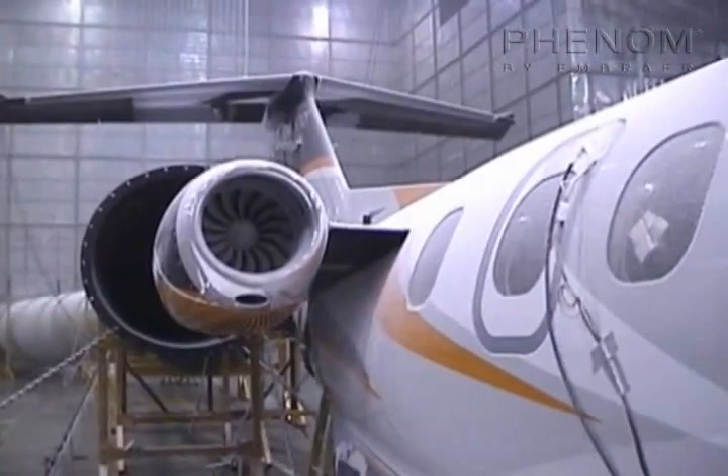Cold soak and subsequent airplane power-up, engine start and after-start procedures have been demonstrated for the Phenom at -40 degrees Celsius, -40 degrees Fahrenheit, following 10 hours of exposure. Tests in natural ice conditions and with simulated ice shapes have demonstrated that the Phenom exhibits satisfactory handling characteristics during operation in ice conditions. This video features pertinent aspects regarding cold soak operation.

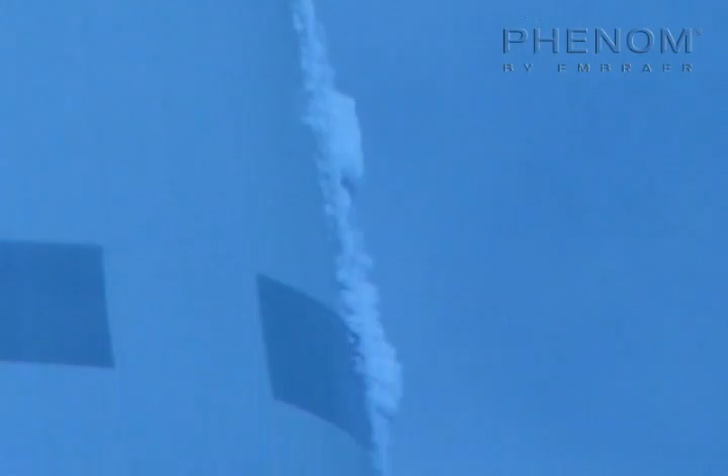As well, it covers the most important aspects regarding flight in icing conditions, expanding or reinforcing previously published information to assist flight crews in pre-planning and operating the Phenom aircraft in adverse weather. In this video, we will take a look at icing from several points of view. Our goal is to ensure that you understand the basics of the icing environment, the principles of flight in icing conditions, and the effect of icing conditions on aircraft performance and handling, to allow you to safely operate the Embraer jet.

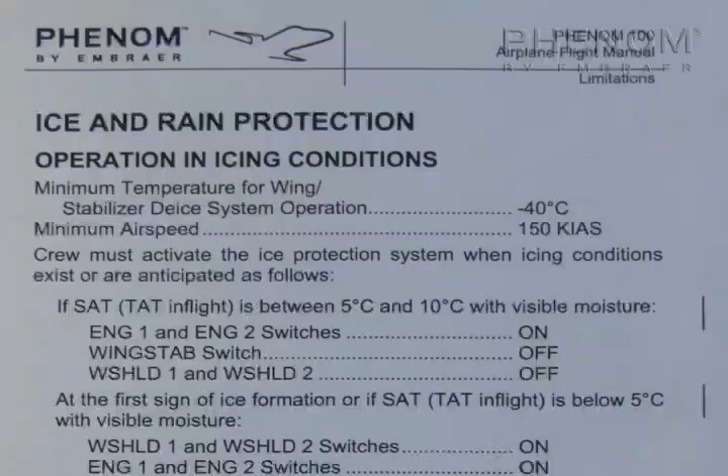A review of the icing phenomena. Icing conditions are defined by the airplane flight manual based on static air temperature for ground operations and total air temperature for in-flight operations. Icing conditions may exist if SAT and TAT is 10 degrees Celsius or below, along with prevailing conditions on ground or in flight.

The general rule is that icing accumulation is always greatest at temperatures not too far below 0 degrees Celsius, 32 degrees Fahrenheit, and usually is negligible at temperatures below about -20 degrees Celsius, -4 degrees Fahrenheit. Contamination on ground can be caused by falling wet or dry snow, slush, frost, freezing rain or drizzle, and the cold soak effect.

Frost is a crystalline, light layer of ice which can form on almost the entire aircraft when the temperature of the exposed surface is below freezing, while the free air temperature may be above freezing. Significant deposits of ice can form on the wing upper or lower surface after the fuel is cold soaked in flight, during a ground turnaround, and can occur when the outside air temperature is above or below freezing.

Ice that can form below a layer of snow or slush may be difficult to detect. Ice which builds up on fan blades and inlet lips can damage the engine when it is started. Any ice contamination on the aircraft prior to takeoff may have a detrimental effect on aircraft performance and handling. Airframe icing occurs when supercooled liquid water in the air adheres to or accretes on the surface of an aircraft.

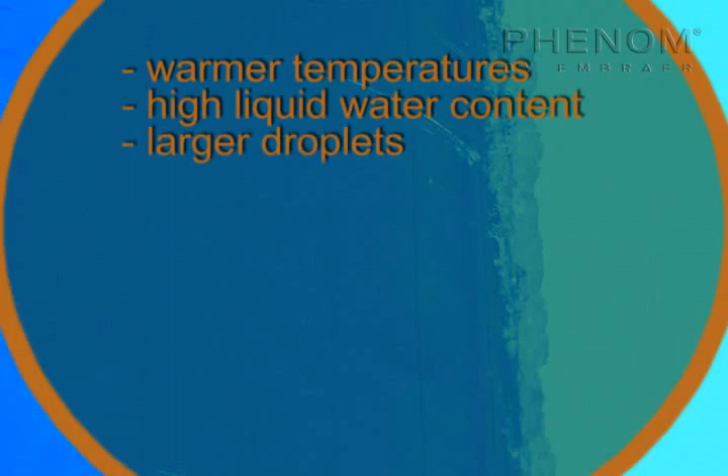Low temperatures, total air temperature between -10 and -20 degrees Celsius, low liquid water content, and small droplets tend to result in rime ice, which has a rather milky, white, and opaque appearance. Warmer temperatures, total air temperatures between well above freezing and down to -10 degrees Celsius, high liquid water content, and larger droplets tend to result in glaze ice, which often has a clear, shiny appearance.

Rime ice is more often found in relatively cold stratiform clouds, while glaze icing is most often found in cumuliform clouds. However, as previously mentioned, it is possible to encounter moderate to severe icing near the tops of stratiform clouds. Flying in a stratocumuliform cloud results in a mixture of rime and glaze ice, which is appropriately called mixed ice. Mixed ice can also occur in many other meteorological situations, where the ambient conditions vary over short distances.

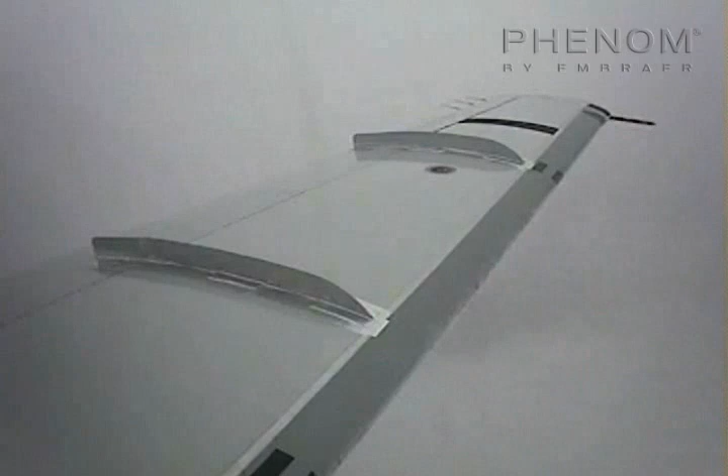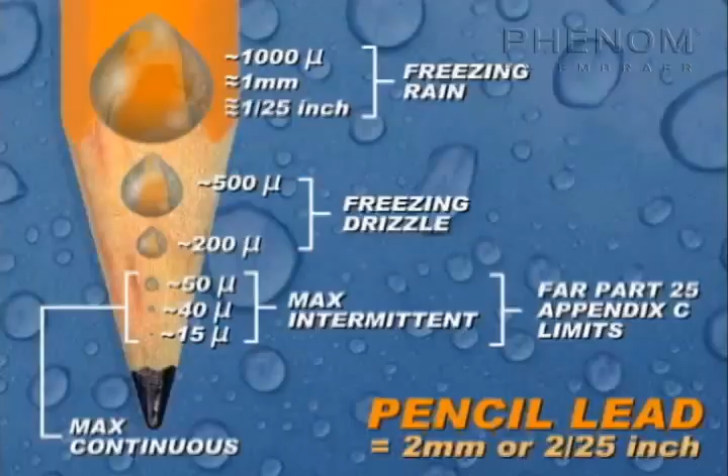Cloud droplet sizes are normally expressed in microns, which is a millionth of a meter. Cloud droplets are typically between 2 and 50 microns in diameter. However, freezing drizzle and freezing rain droplets as large as 1,000 microns, 1 millimeter, can occur. Freezing rain and freezing drizzle are large supercooled water droplets, commonly referred to as SLD, which impact with aircraft surfaces to cause rapid and extensive ice accretion. Icing associated with freezing drizzle and rain is severe icing because aircraft are not designed or certified to handle icing from supercooled droplets that large.

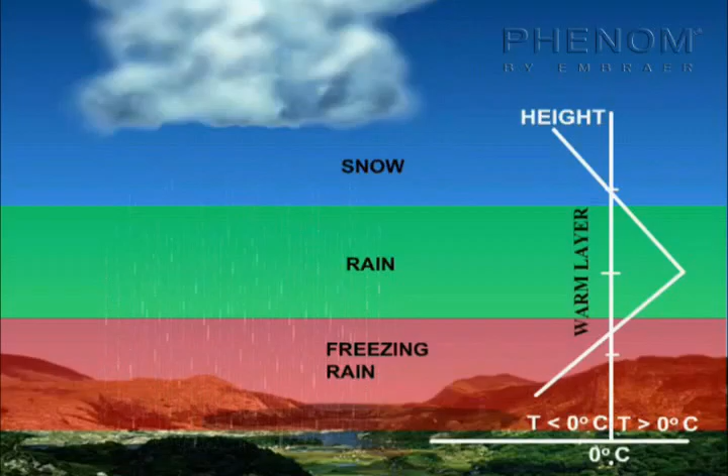Freezing rain is normally associated with temperature inversion. The rain falls from the warm air above into sub-freezing air below. Freezing drizzle forms when liquid drizzle drops fall into sub-freezing air. It can also form and exist totally within a cloud that is entirely at or below freezing temperatures. Freezing rain and freezing drizzle differ primarily by droplet size. While the size definition is not entirely uniform, it is important to know that supercooled droplets larger than about 50 microns represent SLD icing conditions.

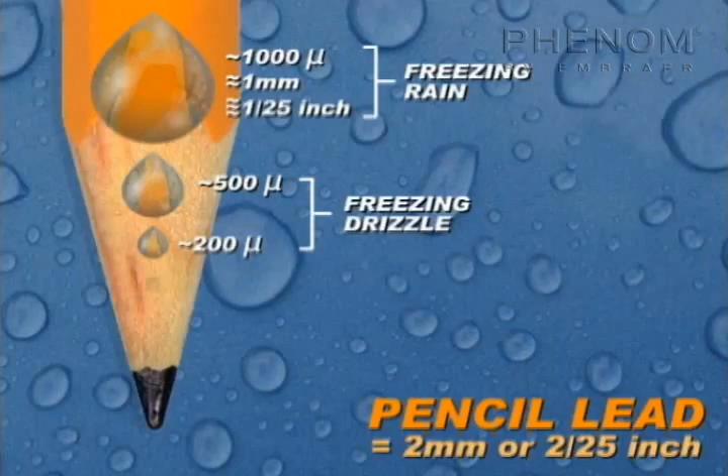No aircraft is currently tested or certified for SLD icing under FAR Part 25 Appendix C, and consequently these conditions represent severe icing. Evidence has shown that severe icing can be found from 20,000 feet down to ground level, with total air temperature down to -30 degrees Celsius, not only during temperature inversion, but also when a moderate wind shear exists near the top of the clouds, as well as in weak cumulus clouds embedded within a stratiform cloud layer.

Any encounter in the form of freezing rain or freezing drizzle constitutes severe icing and requires immediate action by the flight crew to exit these icing conditions. Continued flight in freezing rain and drizzle, or any supercooled droplets larger than 50 microns, is potentially very hazardous and must be avoided or exited as soon as possible. Unusually extensive rapid ice accreted on the airframe in areas not normally observed to collect ice, or accumulation of ice on the upper surface of the wing aft of the protected area, should be assumed to come from supercooled large droplets.

Handling effect. The consequences of ice accretion on the wing and tail surfaces are immediate if the aircraft anti-icing system is not used. Lift is reduced, drag is increased, stall speeds can increase, and the aircraft pitching moment may change. Let's take a few moments to carefully consider the effect on aircraft handling.

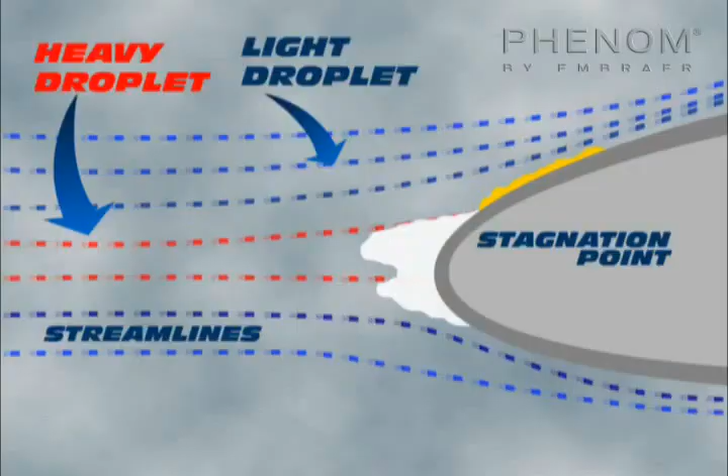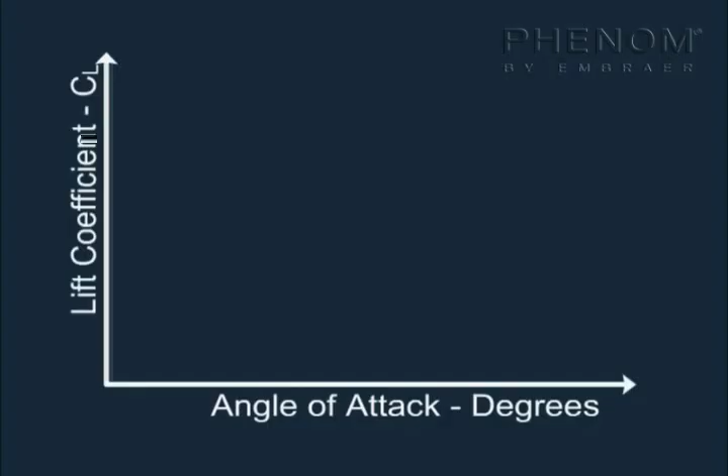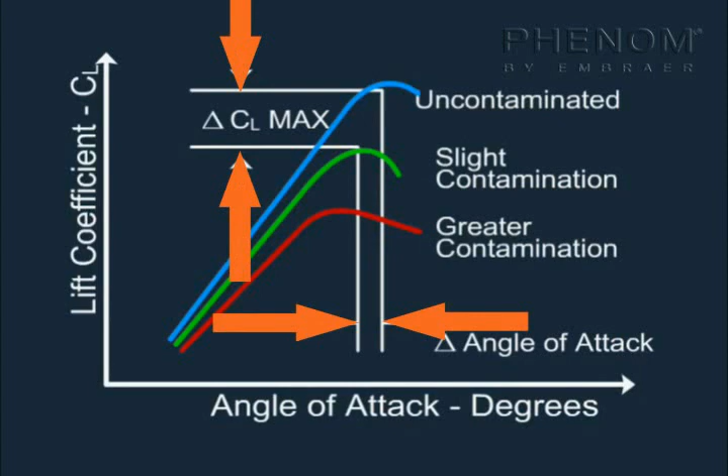In flight, ice will normally accrete in areas around the aerodynamic stagnation point. If ice droplets are big enough, they will strike the wing farther aft, creating a variety of shapes, thicknesses, and textures of ice, effectively changing its shape. Changing the shape of the airfoil will change the airfoil geometry to produce a new airfoil in which the lift, drag, and pitching moment characteristics are different from the wing's designed airfoil. Check the lift curves shown for an airfoil with ice and without ice. Compare the curves and observe the reduction in lift at a given angle of attack and the reduction in maximum lift angle of attack.

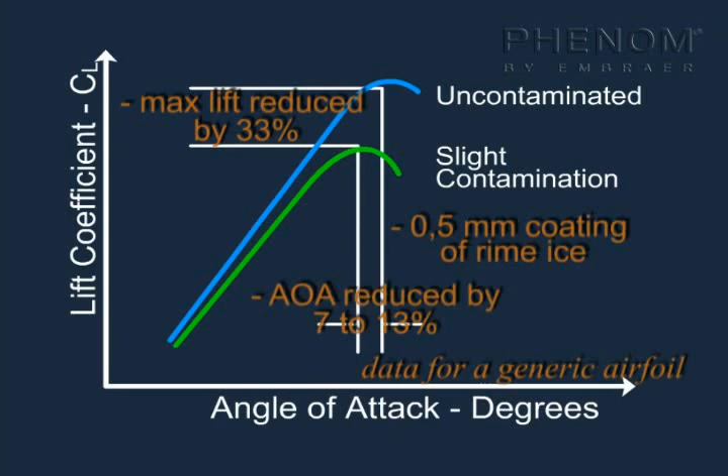For example, for a wing covered with insignificant rime ice, only 0.5 mm thick, the maximum lift capacity decreases 33%, and the critical angle of attack is reduced in this case from 7 to 13%. This shows the degree of potential hazard from a relatively small amount of ice on the aircraft wing.

Ice causes a similar effect on drag. Drag varies greatly from almost no increase to a more typical 100% increase, resulting from rime ice, and 200 to 300% for clear or glaze ice. The overall effect of ice accumulation on the wing is quite obvious. If the aircraft anti-icing system is not used, ice accretion can increase stall speed, resulting in a potential for a premature stall at a lower angle of attack.

To cope with this situation, the Phenom jet stall warning system is triggered at a lower angle of attack in icing conditions. This protection is activated when the wing's ice protection system is on and is displayed to the pilots by a dedicated message.

The responsibility for ensuring a clean aircraft rests with the flight crew. Operating regulations clearly state that no takeoff is allowed when snow, ice, or frost is adhering to the aircraft. This is known as the clean aircraft concept, and it is essential for safe flight operation. The primary method for the flight crew to ensure a clean aircraft is through close visual and physical inspection of the critical surfaces prior to takeoff.

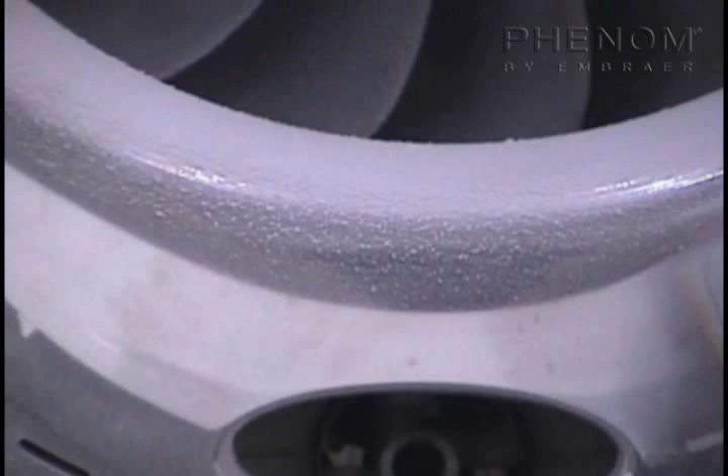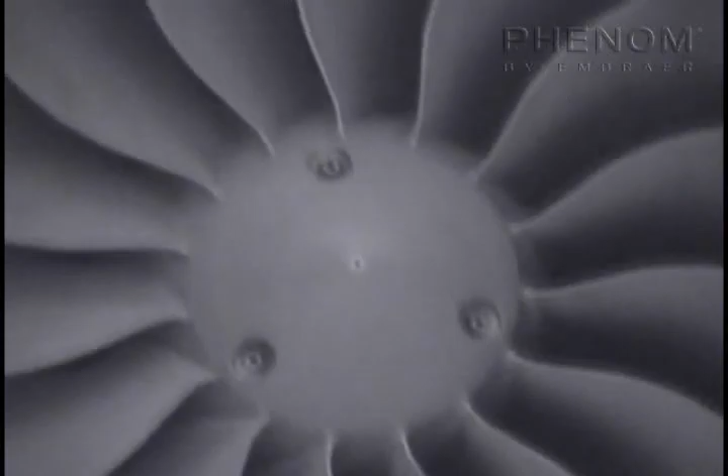Even at intermediate stops, an external walk-around is necessary because of the possibility of ice forming after landing from either cold soaking frost, conventional frost, or precipitation freezing on the aircraft. Although some of the following tasks might be considered a maintenance function, flight crew is supposed to take additional care and inspect those areas where ice or snow will degrade aircraft performance, and carry out the task themselves if no maintenance support is available.

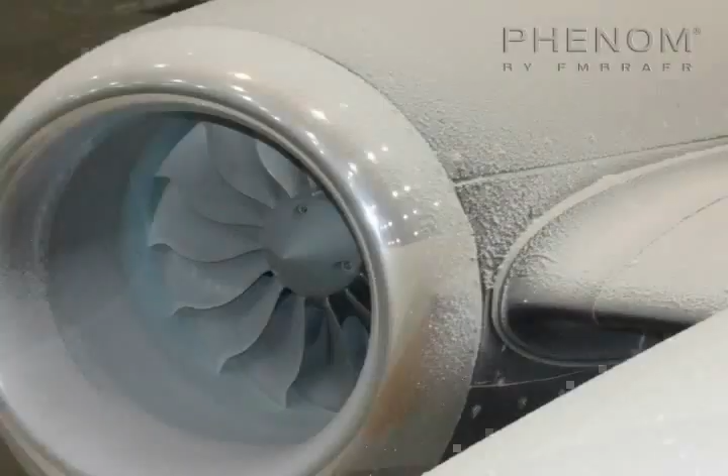When approaching the airplane, evaluate it from a reasonable distance. Watch the area where the airplane is parked and evaluate if there is room for the taxi-out or pushback maneuver. Make a complete walk-around following the established procedures. Remove all protective covers from the engine air inlet and outlet, pitot probes, static probes, and pitot-static probes.

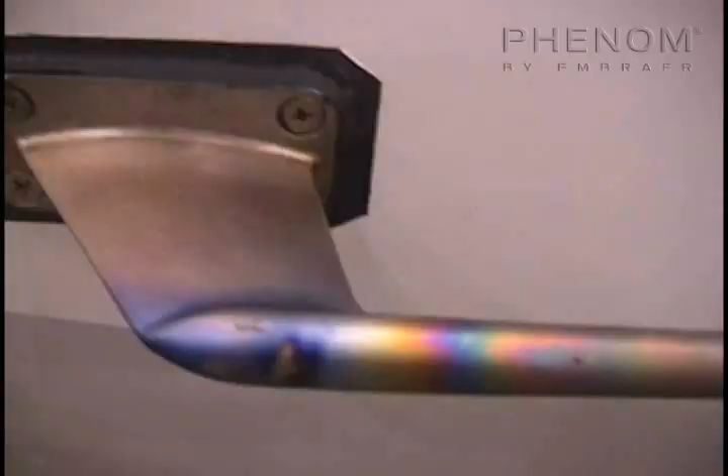Check if pitot tubes, angle of attack vanes, and static ports are clear of ice. Check residues of de-icing and anti-icing fluids in these areas. Ice buildup or gel close to pitot and static ports may disturb airflow over the sensor, resulting in erroneous readings even when the sensors themselves are clear.

Visually check that fuselage, wing upper and lower surfaces, tail and control surfaces are free of ice, snow, or frost. Polished frost is not allowed. In addition, as no contamination is allowed on the wing, carry out a hands-on inspection. Do not touch the surfaces with bare hands, as the skin may stick to a freezing surface.

This first evaluation will tell you if applying de-icing fluid is required. Prevailing and forecast icing conditions will give directions if it is necessary to apply anti-icing. Call for de-icing and anti-icing application in advance to make the local service providers aware of your necessity. Inspect control surfaces, gaps, and hinges for signs of residual fluid or gel. Ask for maintenance assistance to remove residues if any deposit is discovered.

Hoar frost, thin enough to allow distinguishing painting and markings underneath, is allowed on the fuselage. Hoar frost is a uniform, thin, white deposit of fine crystalline layer that forms on exposed surfaces during calm, cloudless night. If necessary, remove snow or frost over the wing filler cap to properly open it. Use hot water to defrost or simply scrape the region with care not to damage the wing or the filler cap.

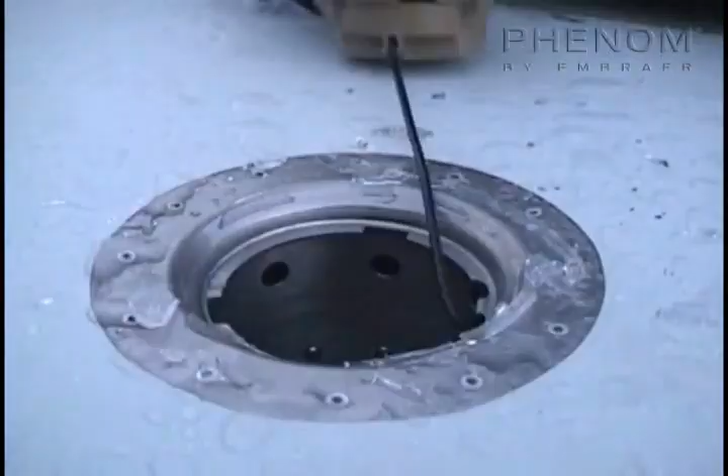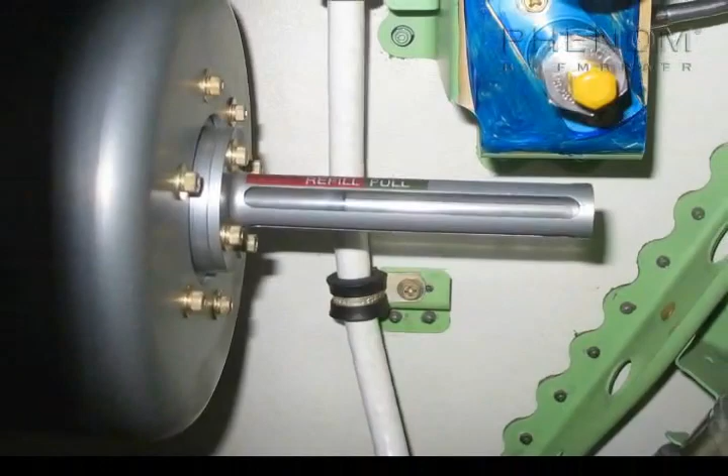Flying at high altitudes can cause suspended and dissolved water to condense out of the fuel and form free water. Water in fuel tanks should be drained frequently and thoroughly. Take the chance and inspect the fuel collected for water globules in the liquid. Check hydraulic accumulator, emergency brake accumulator, and oxygen pressure consistent with outside air temperature. Service fluids as required. Moreover, take a look in the compartment lines for signs of leakage.

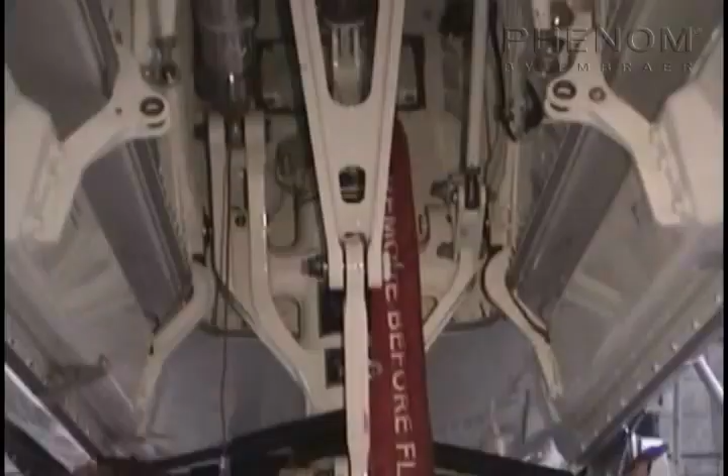Check that all engine air inlets and outlets, drains and vents are clear of ice or snow, and that the fan is free to rotate. It will ensure a flawless start with proper N1 indication. Make sure the pylon's vertical fin ram air inlet and the ground cooling fan inlet-outlet are clear of ice or snow. Check landing gear doors, gear locks, and mechanisms are unobstructed and clear of ice and snow.

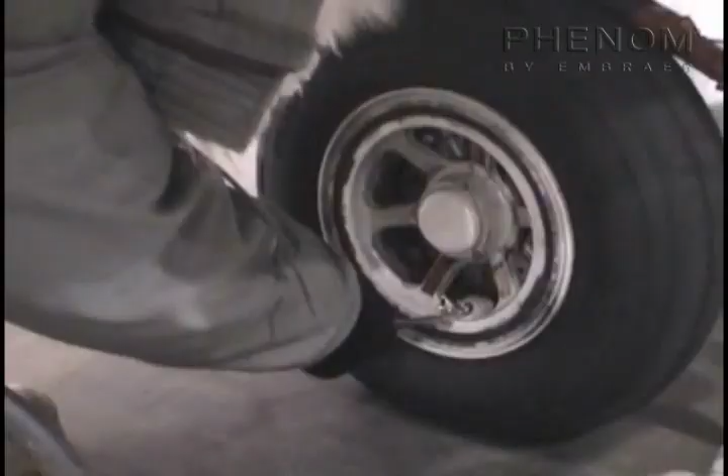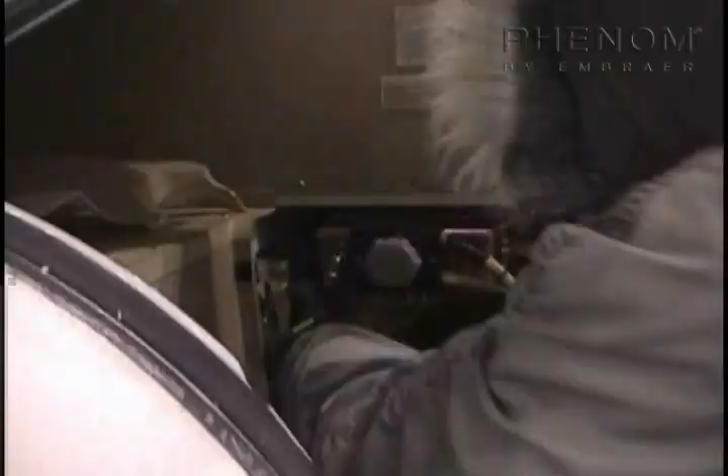Install the batteries if they are removed. Refill toilet water tank with appropriate flushing fluid. Adding hot water at a temperature not exceeding 35 degrees Celsius will prevent water freezing during cabin warm-up.

Make a normal internal safety inspection, caring about the following. Once the batteries are on, and they are currently the only source of electrical power, the pilot must concentrate on saving the batteries. The use of external power is recommended. PFD and MFD may look somewhat faded, mainly after extended cold soak at very low temperatures. Fading will disappear as displays begin to warm.

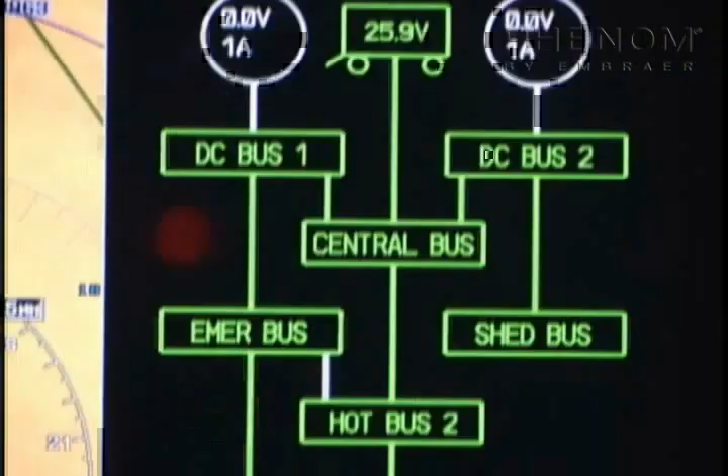Engines may be started when engine indication is readable on the MFD or on the reversionary mode of the PFD. Lighting of the displays should be adjusted to full bright to aid warming LCDs. Minimum battery voltage to start the engines is 24 volts. A warm battery will render a safe engine start.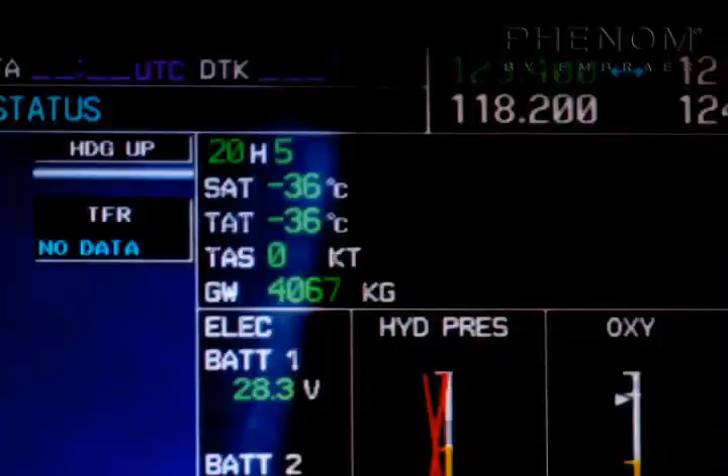If the airplane has been cold soaked at temperatures colder than -18 degrees Celsius, batteries must have been kept warm or removed to a warm place. Below -18 degrees Celsius, use external power as an aid in power up and engine starting. In the event oil temperature is below -40 degrees Celsius for starting, it is recommended that the oil be heated to above -40 degrees Celsius, utilizing dry motoring cycle prior to an attempted start.

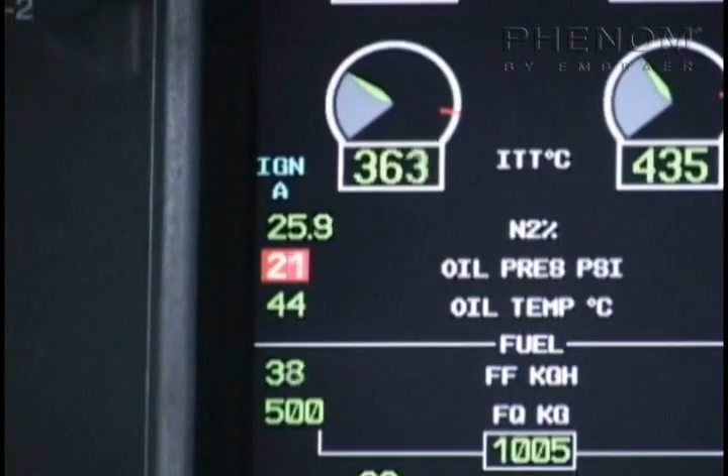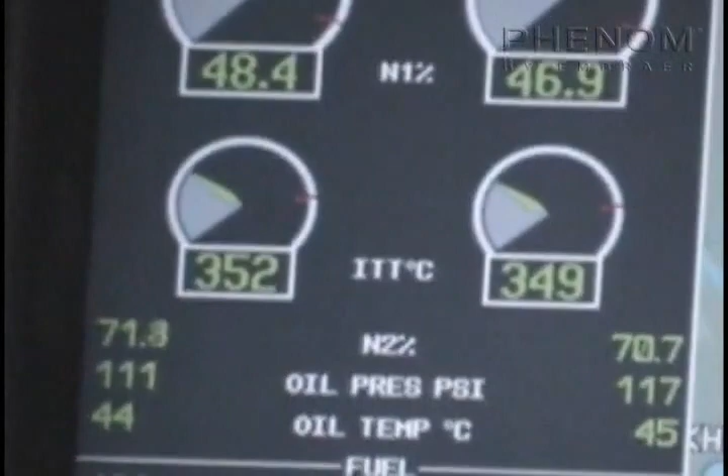Make a normal engine starting, caring about oil and ITT limits. High oil pressure during cold start is normal, and pressure should decrease as engine warms up. After achieving a stabilized idle under cold conditions, or with cold fuel, below 0 degrees Celsius, remain at ground idle until oil temperature reaches 10 degrees Celsius. During this time, the transient oil pressure limit applies.

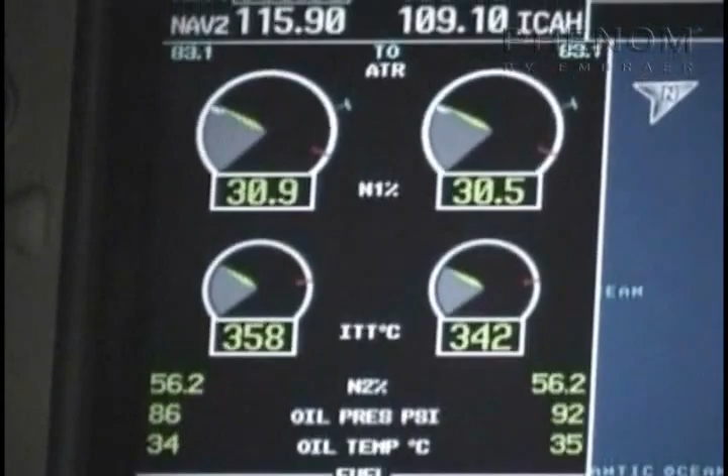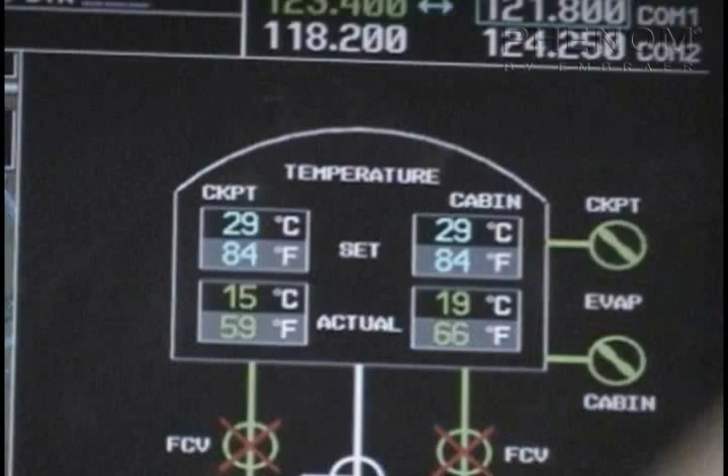Run the engine for an additional 3 minutes to ensure that no ice particles are present in the fuel supplied to the engine. Set the air conditioning to warm up cabin interior. Set mode switch to auto. Cockpit and cabin fans should be on high or medium. Set the cockpit and cabin temperature selector to full hot. With the air conditioning properly set, it may take, for example, 15 minutes to heat cabin from -20 degrees Celsius to 21 degrees Celsius. Preheating the cabin will reduce this time.

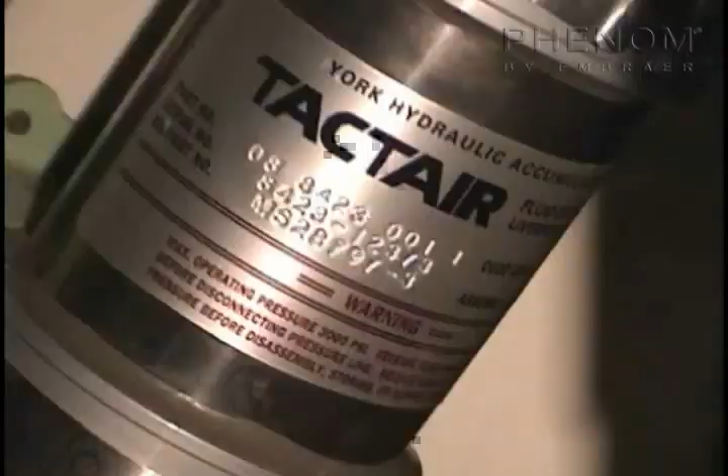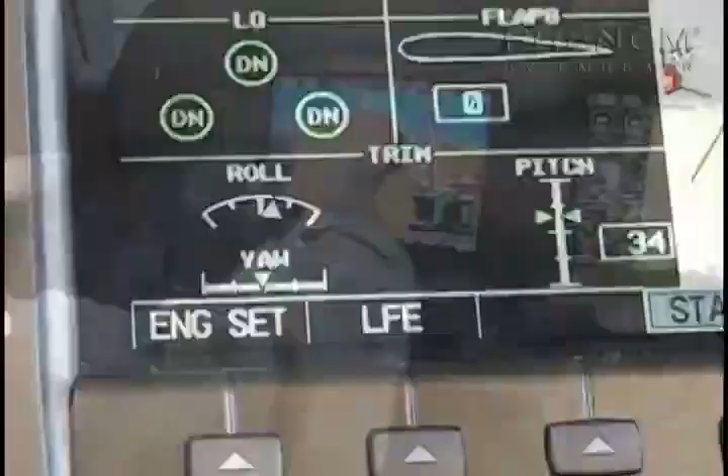After the electric hydraulic pumps are on, check hydraulic pressure. If the pressure does not rise, warm up the hydraulics reservoir compartment with hot air. Check all flight controls for freedom of movement and full travel. Operate all trim systems. If you feel any restricted movement or jamming, ask for maintenance assistance. Extend and retract the flaps. Make sure they are free from snow or ice before moving them. Turn on and check wing inspection lights. Dispatch is not allowed if you are supposed to fly at night in icing conditions, and any light is inoperative.

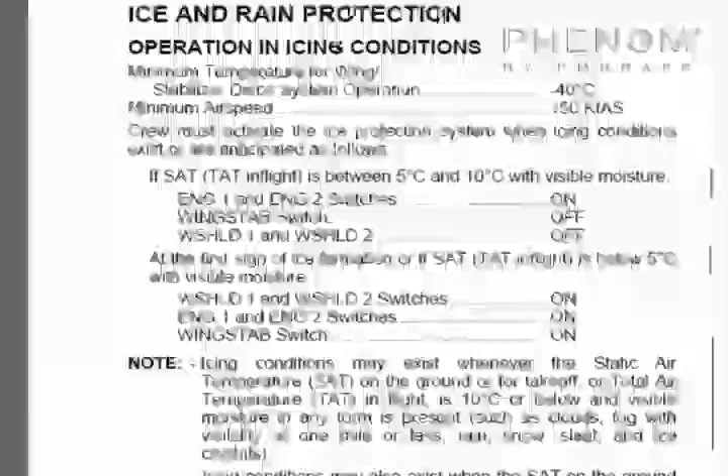After the engines have been started and the ice protection test is performed, turn engine and wing ice protection on when icing conditions exist or are anticipated according to the airplane flight manual instructions. Taxiing on ice, snow, or slush-covered runways should be done at the lowest practicable speed, due to reduced braking capability and the possibility of skidding.

Taxiing with flaps extended exposes the jack screws to contamination thrown up by the main gear. Therefore, always taxi with flaps up on ice, snow, or slush-contaminated runways. If flaps were left up during taxi, complete the after-start checklist before takeoff. Use minimum thrust to avoid blowing snow or slush on personnel or airplanes nearby. Maintain a greater than normal distance behind other aircraft while taxiing in snow-covered runways.

Shortly before the aircraft takes the runway for takeoff, repeat the flight controls check and make a final visual inspection of the wing to ensure that it is clean. When inspecting the wing during your pre-takeoff contamination check, look at the entire wing upper surface and not just the leading edge or wing tip. Although the wing tips can be seen from the cockpit, almost the entire wing is visible from a cabin window. Therefore, it is strongly advisable that a crew member make the visual inspection from the cabin.

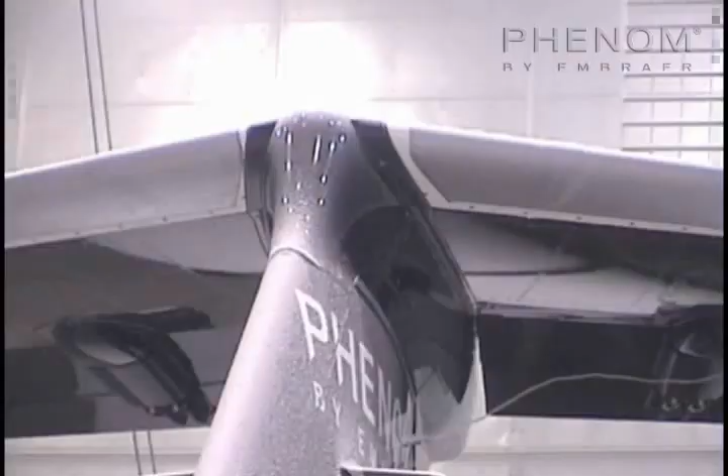Additionally, the crew should ask for assistance of trained and qualified personnel outside the aircraft to assist in the pre-takeoff check to ensure that the tail and fuselage, which are not visible from the cockpit or cabin, are free of any ice contamination. Remember that high winds and jet blast may cause anti-ice fluid to flow off, and other factors can contribute to reduce fluid effectiveness and reduce holdover times. If any ice has accumulated or the holdover time expires, never assume the ice will blow off during takeoff. Return for another fluid application and get de-iced or anti-iced again as the conditions require.

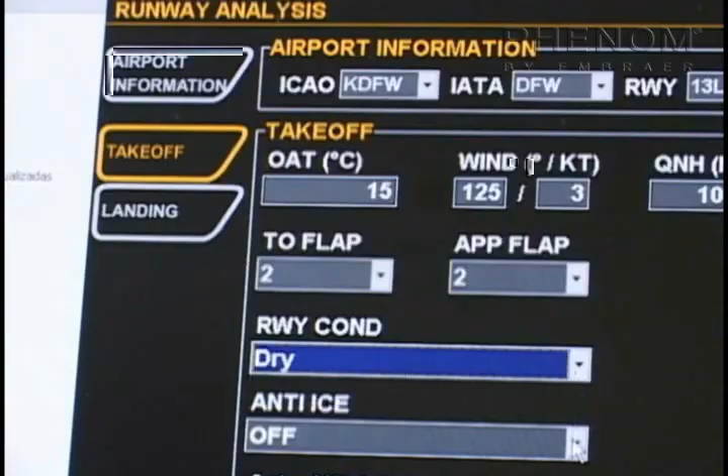Review the takeoff performance analysis to determine the appropriate weight and speeds for anti-ice system on. In a situation where field length and surface conditions are not optimal, use maximum allowed thrust. Particular attention and proper assessment is required to cope with contaminated or low-friction runways.

Takeoff in a normal manner. Rotation does not require any special technique. As demonstrated by flight tests in icing conditions, the Phenom jet exhibits good handling and responsiveness and requires no special procedures in Appendix C icing conditions when operated in accordance with the airplane flight manual.

Once airborne, monitor pitch attitude and airspeed continuously with autopilot on or off. Performance changes such as airspeed decrease, reduced climb rate, and/or higher than normal pitch angle may be an indication that ice has already accreted onto the airframe. If ice-related performance decreases are noted, ensure that all systems are selected on and make the required thrust and attitude adjustments.

Remember that icing in flight can occur at any time of the year. Therefore, it is necessary for the flight crew to monitor the systems and remain cognizant of ice any time the airplane is in icing conditions, even in the summertime.

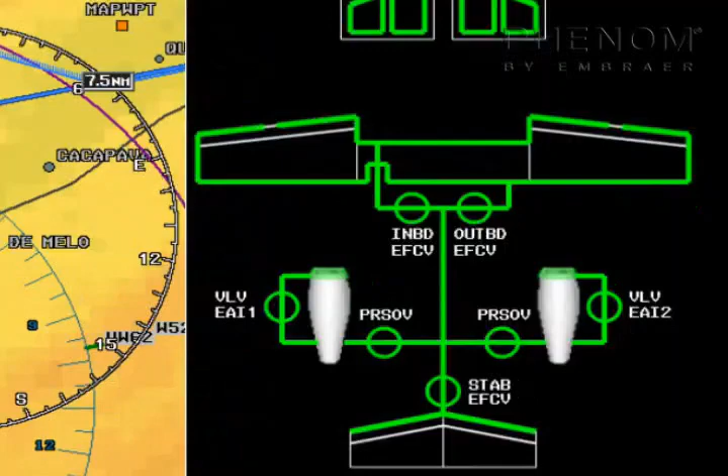Visual observation of ice on the windshield pillars is a clear indication that icing conditions are present and ice is accreted on the aircraft. Verify that the engine, wing, and stabilizer valves are open on the ice protection synoptic page on the MFD. The flight crew should also be alert for visual cues of unusual icing. If ice accumulation is rapid and severe, such that the anti-ice equipment fails to reduce or control the hazard, request immediate clearance from ATC and leave the icing conditions.

Remember, unusually extensive ice accreted on the airframe in areas not normally observed to collect ice, or accumulation of ice on the upper surface of the wing aft of the protected area, should be assumed to come from supercooled large droplets. Again, leave these icing conditions immediately if severe or large droplet SLD icing is observed.

Flight crews should be particularly vigilant if icing conditions exist while the aircraft is in a holding pattern. Remember that minimum airspeed in icing conditions is 150 knots indicated. Flaps and gear must be retracted. Should severe icing conditions be encountered during holding, the flight crew must closely monitor the icing and take immediate action to exit the conditions. It is never good practice to continue to hold in icing conditions.

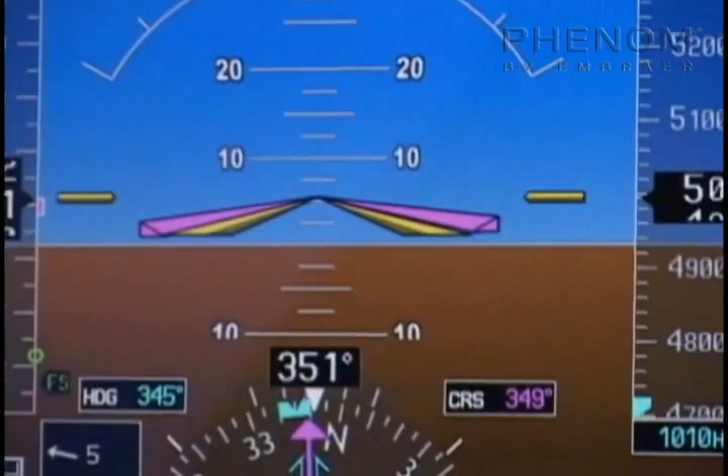The autopilot may mask tactile cues that indicate adverse changes in handling characteristics. Use of the autopilot is prohibited when any of the SLD cues specified before exist, or when unusual lateral trim requirements or autopilot trim warnings are encountered while the airplane is in icing conditions. If the autopilot is engaged, hold the control columns firmly and disengage the autopilot.

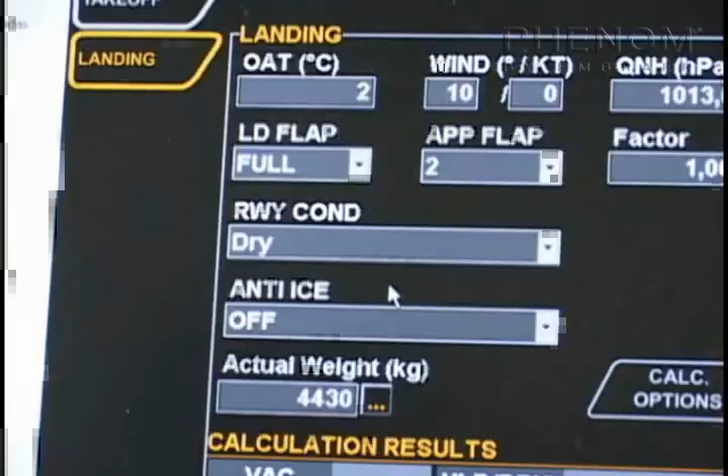Review all approved performance data required to land in icing conditions. This requires reviewing associated speeds and special procedures for landing with a failed anti-ice system. Landing on runways contaminated with ice and slush requires that flight crews plan and execute the approach and landing properly to be successful. Fly the stabilized approach concept.

It is essential that the aircraft is configured and stabilized passing 1,000 feet AGL. Cross the runway threshold at 50 feet and VREF and place the aircraft within the 1,000 feet mark. Touch down on the center line to provide maneuvering margin if the aircraft starts to drift because of runway surface contamination, and lower the nose wheel immediately. Apply brakes symmetrically. Use proper braking techniques to cope with a short landing distance.

If the landing weight is limited by runway length, the use of maximum brake effort is mandatory until it becomes obvious that there is enough remaining runway for the use of milder braking. If no deceleration is felt, hydroplaning might be on its way. Do not use emergency brakes, as it may cut anti-skid protection. Keep the pressure on the pedal brakes until the airplane decelerates.

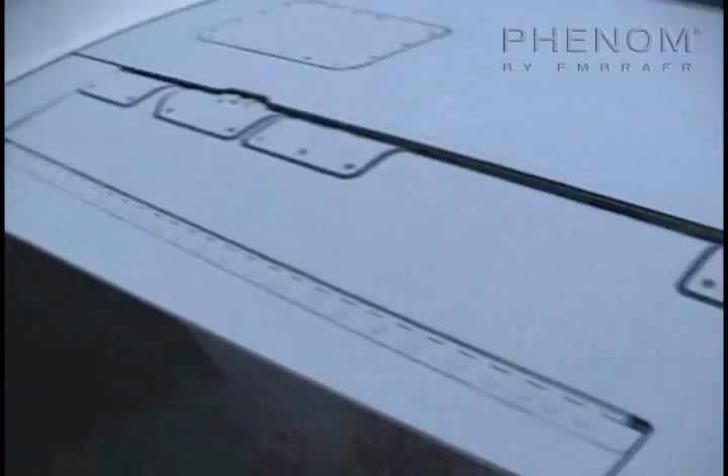After landing on a contaminated runway or after operating in icing conditions, flap retraction to zero should be delayed until they have been inspected and confirmed clean of deposits of ice or slush. Once you have landed in icing adverse weather conditions, preparing for a cold soak period becomes the next task. Good preparation to preserve the aircraft from the effects of low temperature is the key to avoiding delays.

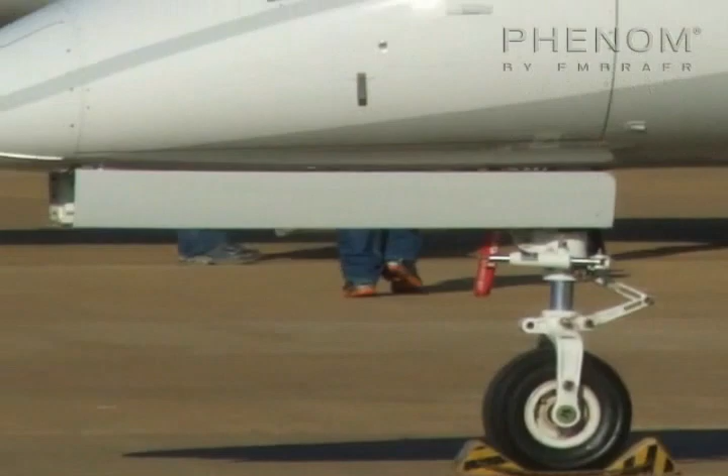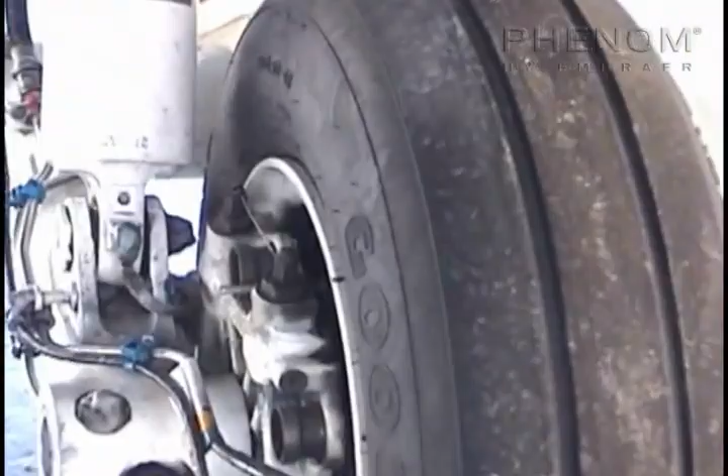In most cases, it is more economical and time-saving to use a hangar than leaving the airplane outside in the harsh weather. Put wheel chocks in place. Apply parking brakes only on icy ramps. Otherwise, parking brakes should not be applied to avoid freezing of the brakes. Remove from the aircraft any item that can freeze or deteriorate when subject to low temperature.

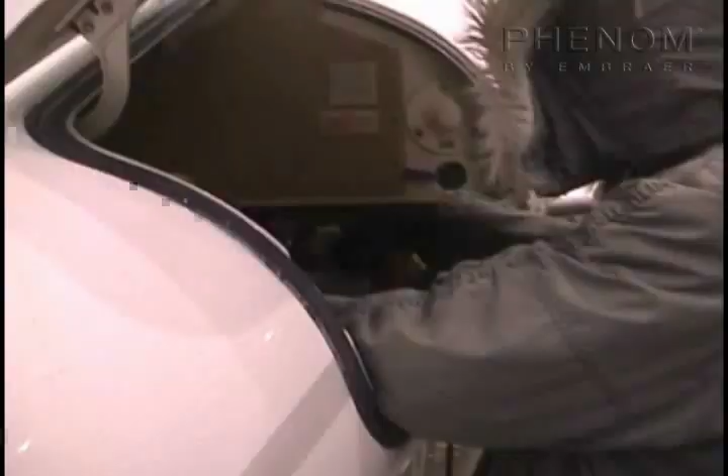Remove the waste tank if the aircraft will remain soaked below 0 degrees Celsius, 32 degrees Fahrenheit. Proceed to fuel system draining. Remove the batteries and keep them in a warm place, or have a battery heater connected if the aircraft will remain soaked below minus 18 degrees Celsius, minus 1 degree Fahrenheit.

That's it. Be prepared to respond to any icing conditions and review all available material and all information that can assist you in making practical and safe decisions. Continuous flight crew alertness to the meteorological hazards and the effect of contamination on aircraft performance is essential. Close adherence to cold-soak recommended procedures and knowledge of all aspects regarding this operation is quite important to save time and render a safe flight.

Advanced preparation and situational awareness by the flight crew will ensure that safety is maintained during all cold weather operations and especially in icing conditions. Fly safely.